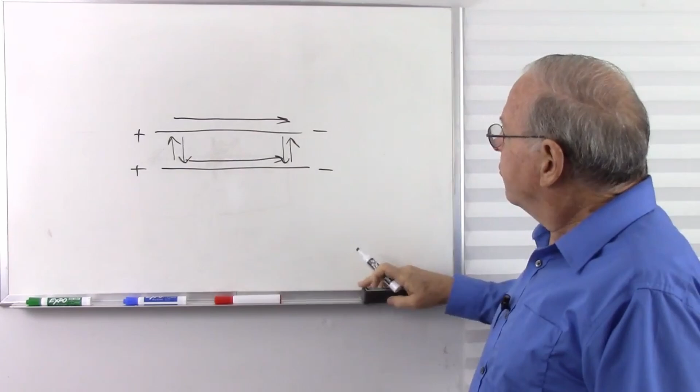But if he reversed it so that the current in one wire was traveling in the opposite direction, the wires would repel each other. And in further experiments, he developed what we now call Ampère's law, which is that the attractive or repulsive force between the wires is directly proportional to the length of the wires and the strength of the current, and inversely proportional to the distance between the wires.

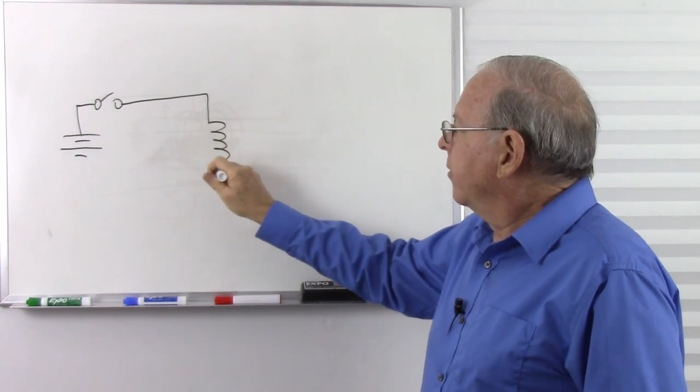In the 1830s, Michael Faraday and Joseph Henry independently did experiments with coils of wire where they took their battery, and I'll put a switch here to control the current, and they coiled up the wire so that the magnetic field became concentrated. And one thing they discovered is if you put two coils of wire near each other, and I believe what they did is they made a very tiny gap in this loop of wire here. So there's a gap. I'll make it bigger just so you can see it.

But what they discovered is when you closed the switch you got a tiny little spark over here. And when you open the switch, you got another spark.

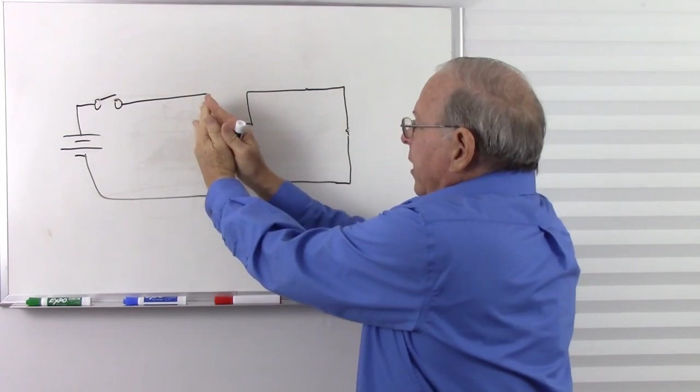So what they discovered is that when you close the switch, what happens? We close the switch, a magnetic field builds around this coil and it crosses the other coil. And when that magnetic field moved across the other coil, it caused a current to flow here, which induced enough voltage to ionize the air and cause a spark and cause current flow in the loop.

But once the magnetic field stopped moving, there was no longer any current in this wire. They could not measure any magnetic field or any other way of measuring current in the wire. But then again, when they opened the switch, that magnetic field collapsed, and the moving magnetic field, now going the opposite direction once again, caused a current to flow, which caused enough voltage to develop across the gap to ionize the air and cause another spark.

So what they discovered is what we call mutual induction. The moving magnetic field around this coil induces a current in the other coil, but the induction only happens when the magnetic field is moving. So Michael Faraday and Joseph Henry were doing these experiments about the same time, and the scientific community chose to give credit for the discovery of mutual induction to Michael Faraday.

What they gave credit to Joseph Henry for was he discovered that there was induction going on even in a single coil. He discovered that when he closed the switch, he would get the magnetic field around the coil, and then when he opened the switch, he would get a spark across the gap as the switch opened. His first thought was that the electric current had momentum and wanted to keep on moving because of that momentum and would develop enough voltage to ionize the air and cause the spark.

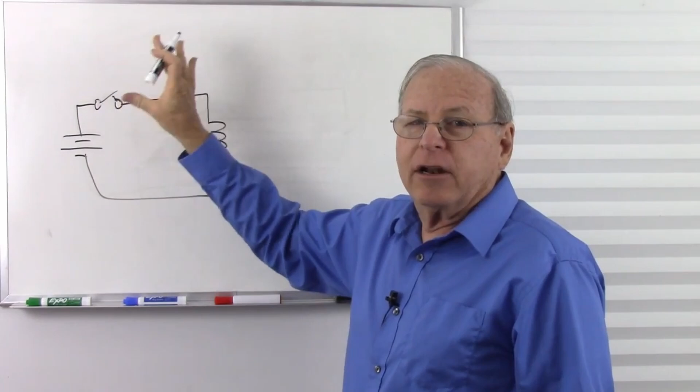But what he later realized was that when he closed the switch, the magnetic field built up and stopped, and then when he opened the switch, that magnetic field collapsed. And what he was realizing, if we take a closer look at it, is that if we look at a couple of turns of that coil, here's a couple of the wires in the coil, and they're adjacent to each other. What he discovered was each one of these has its own magnetic field. It's easier to explain this by waving my hands frantically rather than trying to draw something.

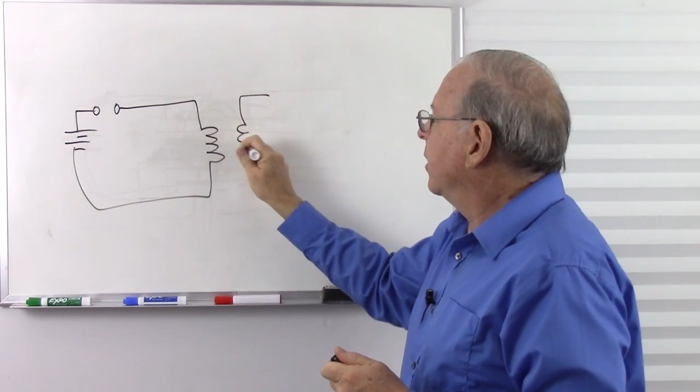But when he closed the switch, the magnetic field built up. When he opened the switch, that magnetic field collapsed, and the moving magnetic field from this wire moving across the next wire induced a current in that wire. So he discovered self-induction. So if you have two coils, put our battery back here, switch, coil number 1, coil number 2, and our little spark gap.

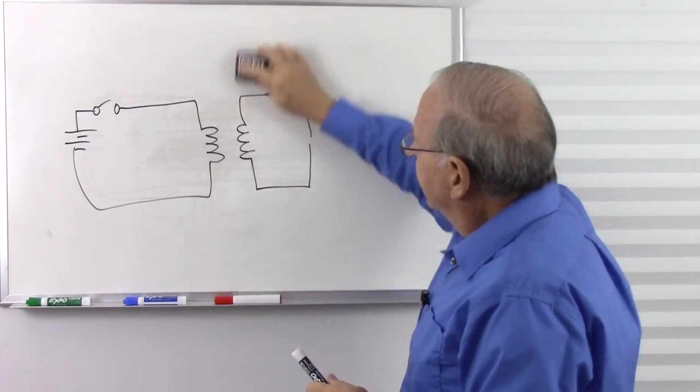If you have two coils and the moving magnetic field around one crosses the other one, that moving magnetic field induces a current in the other coil, only when it's moving. That's mutual induction, credited to Faraday. And then Henry discovered that there's actually induction inside the coil itself that we call self-induction.

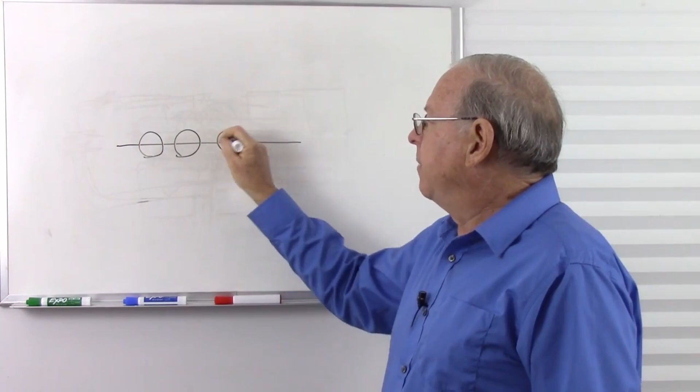So what we've discovered is that if we have a wire and there's no electrical current flowing through the wire, there is no magnetic field around the wire. But if there is a current flowing through the wire, there is a magnetic field around the wire, and that magnetic field is cylindrical shaped, as Oersted discovered by moving the magnet around it. And there's no north or south poles because the south and north poles of this field are basically lined up.

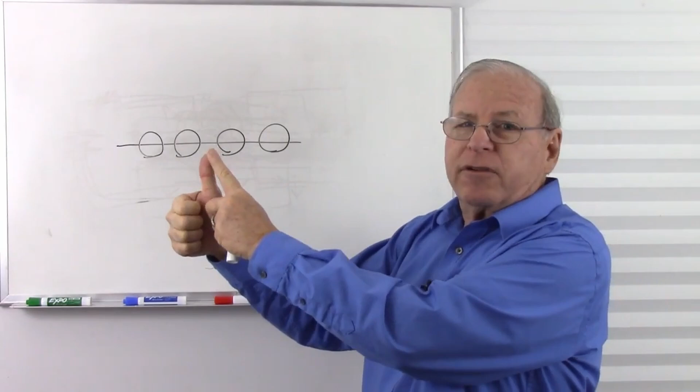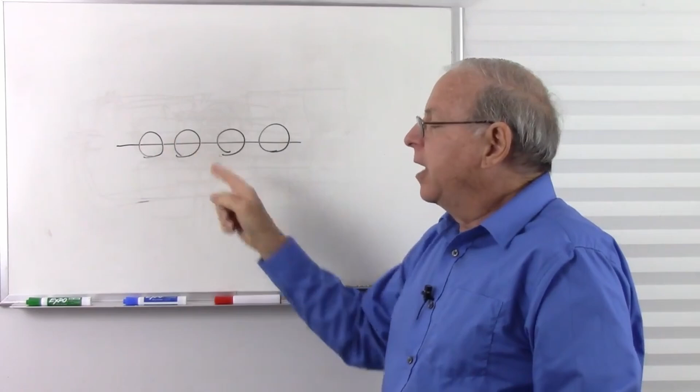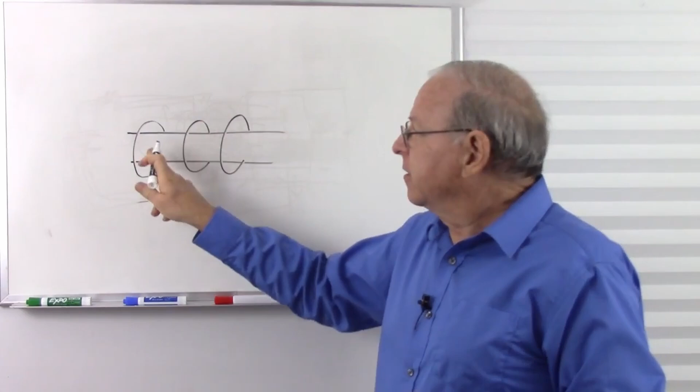It's something like this. If you take your right hand and stick out your thumb, here is the direction of conventional current, and the magnetic field wraps around the wire in the direction of your curled fingers, with the north poles of all these little magnetic domains, if you will, going around circularly with the north poles off the tips of your fingers. You can look at it like this. We have the wire, and here's our magnetic field. And look at that magnetic field like a whole bunch of little permanent magnets lined up end to end.

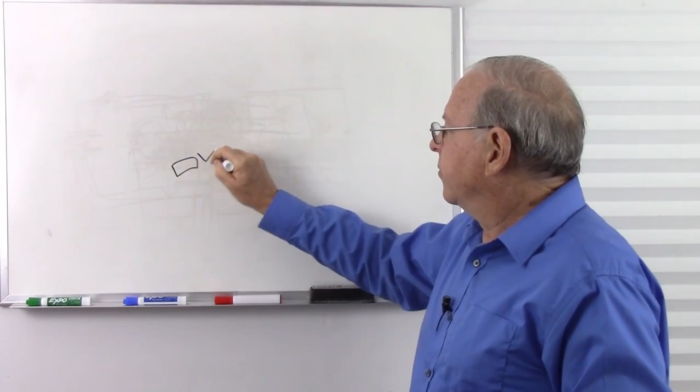And I'll draw this from a different angle. Think of it like this. Here's one magnet, here's another magnet, here's another magnet, and they go all around in a loop, and we have a north pole, north pole, north pole. And so there's no north or south pole to this loop because they're all end to end, and the direction of the north and south depends on conventional current: it goes the direction of my thumb, the north poles are the directions of the tips of my fingers. That's what Oersted discovered. So we have the wire, no current, no magnetic field.

What we also discovered is if we have a magnetic field around that wire, if that magnetic field is not moving, it has no effect on the wire. But if the field is moving, it induces a current. So if the field moves one way, it induces a current in one direction. And if the field is moving the other way, it induces a current in the other direction.

So here's what we know about electricity and magnetism. When you have an electric current through a wire, we have a magnetic field around that wire, but only when the current is moving. If we move a magnetic field across a wire, we get current in that wire, but only if the magnetic field is moving. So there's the relationship between electricity and magnetism. Moving electricity causes magnetism. Moving magnetism causes electric current.

But why do you have a magnetic field in the first place, and why does it only exist when the current is moving? Well, let's set some groundwork to understand that by looking at some atomic particles. Let's start by looking at the proton, which is an atomic particle that has a positive charge. I could go in deeper and explain what a proton is, being a persistent kink in space-time. Let's not go there now. That's for another video some other time. But a proton is a particle that has a positive charge.

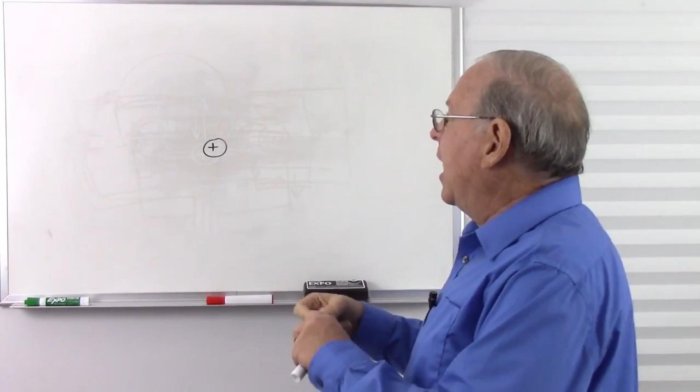And if we add enough energy, such as heat energy, that electron will leave. It'll have too much energy to stay in orbit, and now it's off somewhere else, and it's able to move wherever it wants to move, and the proton's able to move wherever it wants to move. And if we remove the energy so that the electron doesn't move away, it will come back in and fall back into orbit around that proton because they are attracted to each other and want to be near each other.

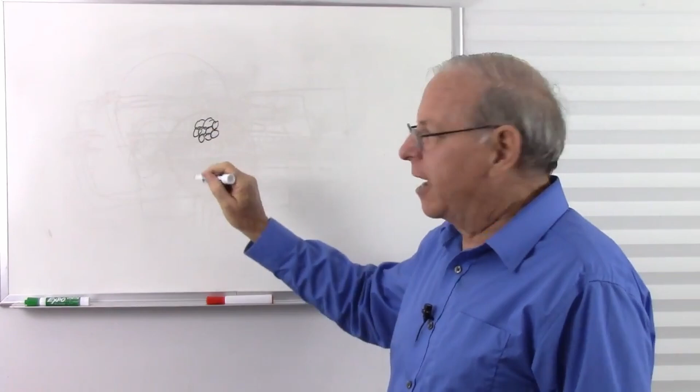Now let's take a look at a copper atom. A copper atom, we have 29 protons, all clustered in a little nucleus. Don't want to get into atomic physics as to why that happens, but it does. So there's our copper atom, 29 protons, and so those 29 protons will tend to attract in 29 electrons. And they do this in such a way that 2 of those electrons will be orbiting so close. Now these are orbital shells, as they call them. That's not as clean as this.

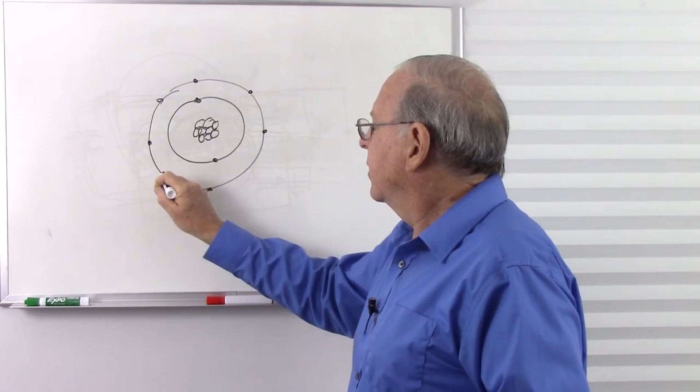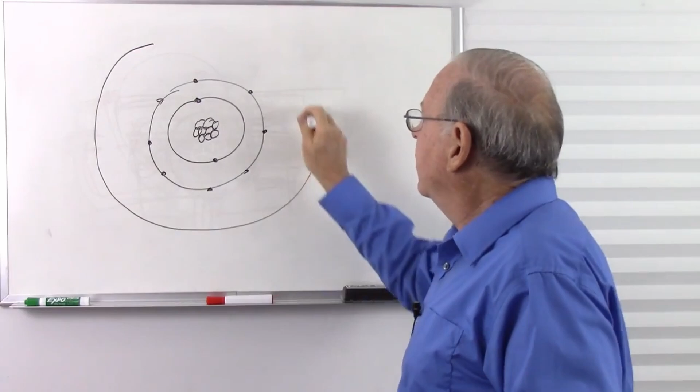The energy of the electrons kind of forms a sphere around the nucleus, and depending on the type of element, they might concentrate in certain areas. But just think of the electrons as a sphere around the nucleus. But we model it as 2 electrons in orbit at that distance. And there will be 8 electrons in the next shell up. And then a couple more shells until we have 28 electrons in these shells. And finally, we have the outermost shell, which has 1 little lone electron.

Now, it's the nature of metals, which by definition, with a couple of exceptions such as arsenic and antimony, metals are typically elements that have 1, 2, or 3 electrons in this outermost shell, which is called the valence shell. And that's where all of your electrical and chemical activity takes place.

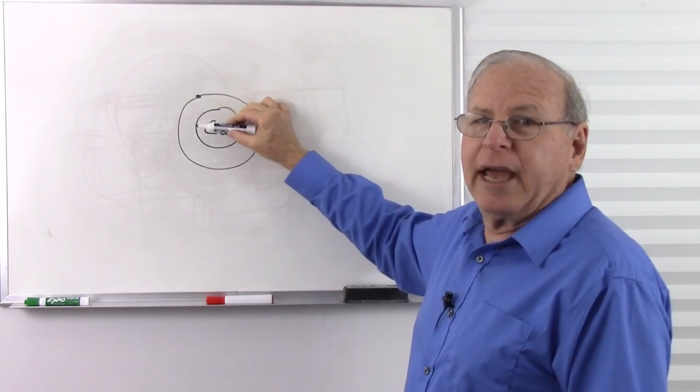And so we look at atoms as having 2 parts. One part is the kernel. And we'll make this a copper kernel. And that will be the nucleus plus all of the electrons except for the outermost shell called the valence shell. In the case of copper, there's only 1 electron in that valence shell. So there is your copper atom. The copper kernel, the nucleus plus 28 of the electrons, and the 29th electron out in this outer shell.

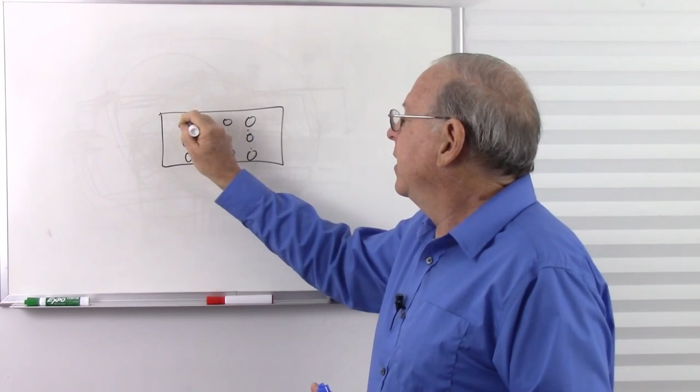When metals form a mass, they form a structure such that that outer layer of electrons does not fit in cleanly. And so, if I have a mass of copper, these are copper atoms. Of course, there's gazillions and gazillions of copper atoms, but for each atom, actually there's copper kernels. For each kernel, there's one electron nearby. But because of the nature of the way metals form structures, they form what's called a metallic bond. And the metallic bond is such that the outermost layer of electrons is free to move around.

So these electrons can move around just like the air moves around in this room. So I have molecules of air moving around in the room, and they can move wherever they want to, but they need to stay evenly distributed, otherwise the pressure will become different in one place to the other. So if some air molecules move this way, some other molecules have to move the other way to take their place to keep everything even. Same thing happens in a mass of metal. Electrons can move around, some electrons can move one way, but other electrons have to move the other way to take their place, just to keep them all evenly distributed.

Now if I take a battery and connect it across this copper, positive to negative, now this positive charge is going to attract electrons in that direction. And this negative charge is going to push electrons in that direction. And the battery is able to supply electrons to come in this way and to suck them out this way. The battery actually acts like a pump, and it tries to pump electrons around the circuit. And so the positive charge pulls electrons this way and sucks them out. The negative charge pushes in electrons this way, and we now have the electrons moving through the wire, and that's how an electric current is made.

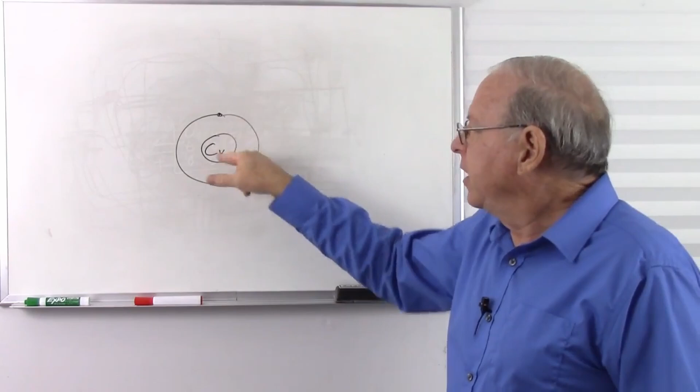So how does this moving current cause a magnetic field? Well, before we tackle that, let's take another look at what's going on. Taking another close look at that copper atom. Here's the copper kernel. Here's the valence electron. And right now we have 29 protons and 29 electrons total, so the atom is electrically neutral. There's no detectable electrical charge here.

However, if we throw some energy in, this valence electron, which is the most loosely bound electron, can leave the atom. And when that happens, what do we have? We have some electron over here, and we have 29 protons, but only 28 electrons. It's no longer electrically neutral, so this appears to have a positive charge. So what we have now is a positive copper ion and a free electron, and that will stay that way until the electron loses enough energy, or some other electron with less energy comes back in and falls back in around the orbit, turning that positive ion back into a neutral atom.

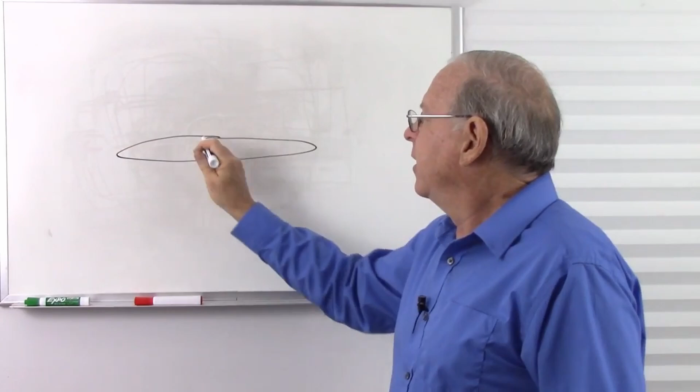Well, a funny thing kind of happens with what an ion is. The ion is not positively charged per se because of the positive protons in there. It's an ion because of the absence of an electron. This might be a little hard to wrap your mind around, so let's examine it closer by playing a game of golf. So we've gotten to the green. Here's our green, and there's the hole. And a golf hole is something that has an attractive force toward golf balls because they tend to end up in there. Some of my golfing friends might not think that's funny, but we can look at it that way.

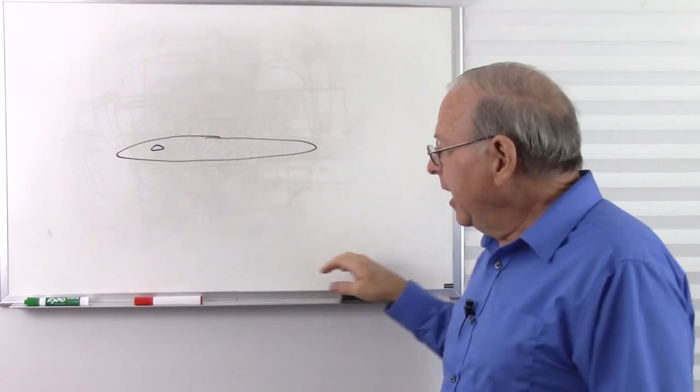So there's the hole, and what is that? It's nothing. The hole is only there because somebody took some dirt out. So the presence of the hole is not the presence of anything, it is the absence of dirt. And an ion is, go back to our copper ion. So there's our kernel, 29 protons, 28 electrons. And so it has a positive charge not because of the presence of the protons, but because of the absence of that 29th electron. So it's very similar to that golf hole. It's a hole not because there's something there, it's a hole because there's something missing. So now let's take a look at Ampere's experiments again.

Here's our two parallel wires. And these wires consist of, let's say they were copper wires, of gazillions and gazillions of copper atoms. And since it's a metal, and since the outer electrons are disassociated, we can think of it as gazillions and gazillions of copper ions with free electrons floating around.

So let's draw those copper ions. Draw them as little circles, kind of look like little holes. As a matter of fact, that's what physicists and engineers call them. They call them holes. They're absences of electrons. So I'll just draw these ions down here. I'm drawing them on one side of the wire just to facilitate what I'm drawing, but they'll be all through the wire, and there will be gazillions of them. And for each one of these, there is an electron that is free to float around the wire.

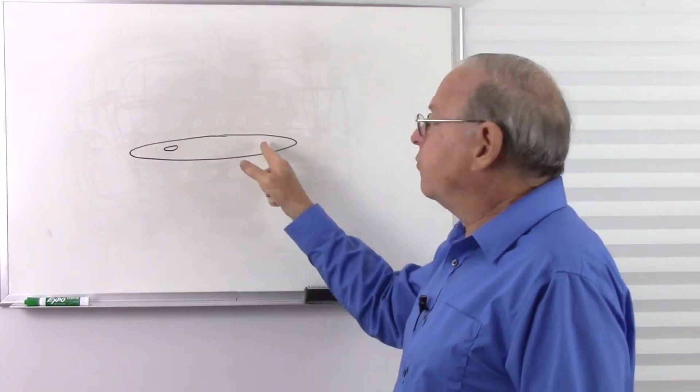What happened is that the keeper came out there and took some dirt from here and put it over here. The dirt moved, not the hole, but you can't tell. You go out there and you say, I didn't see it move. All I can see is it was there yesterday, today it's there. The hole moved. And so that is what happened, is that the dirt moved one way, but the hole moved the other way. And positive charges do the same exact thing.

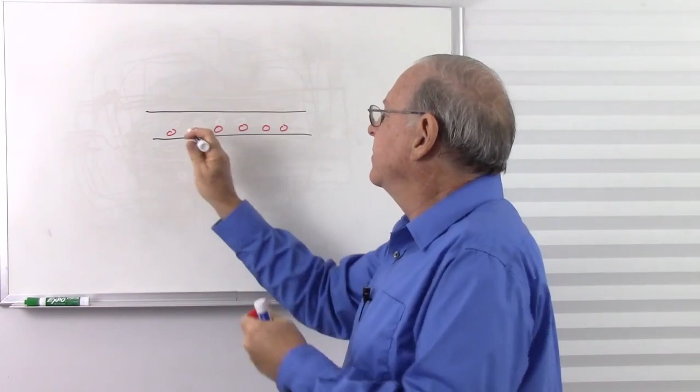So back to our wire here. And once again, here are our positive charges, or positive ions. And here are our electrons. And let's see, negative to positive. The electrons are moving that way. So this is just like if you have a whole bunch of holes in the golf course and we're moving the plugs of dirt from here to here to here. Well, the dirt is moving this way, but the holes are moving the opposite direction. And exactly the same thing happens with these positive ions. So as the electrons are moving one way, the positive charges, not something physical, but the absence of the electrons, are moving in the opposite direction.

And it might be like, what? There's nothing really moving. Well, there's nothing moving when the hole moved, but the attraction force that the hole exhibited on the golf balls did move. So the attractive force that these ions exert does move, even though the ions don't. So when the electrons move this way, the positive charges move the other way.

We've also established that when these charges are stationary, when we don't have any voltage across there, nothing special is happening. But when we put the voltage across there and get these charges moving, we get a magnetic field around this wire. We know that because if we put a compass needle close to it, that compass needle will line up perpendicular to the wire. So how do these moving charges produce a magnetic field? Well, to explain that, we have to talk about relativity.

We experience that every day. Let's say that you are stopped in traffic at a traffic light on a slight hill. You're waiting for the light to turn green, and the car next to you starts to roll backwards. You see that car rolling backwards, and you think, holy cow, I'm rolling forward, and you press harder on the brake to stop yourself, and you say, well, I wasn't rolling forward, he was rolling backwards. But to you, for a moment, it seemed like you were going forward. You couldn't tell the difference because there were no other clues, because all you saw was him moving and you didn't feel anything. You thought you were moving.

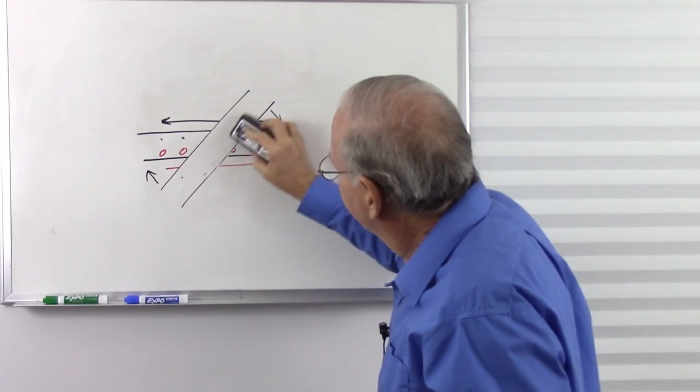Electrons, positive charges. Positive charges are now going this way, and electrons are now going this way. So what's going to happen? These positive charges are going to see more positive charges here, so they're going to be repelled, and vice versa. So it's going to want to rotate around the other way. So if we have two wires with currents flowing through them, and one of them is free to move, they're going to tend to align.

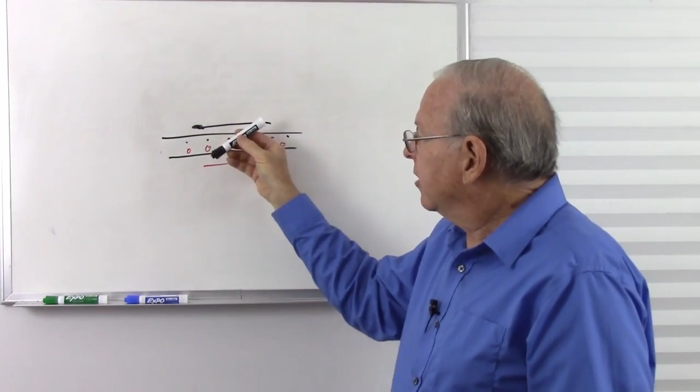Here's the far wire. Here's our moving charges. Electrons are moving that way. Positive charges are moving that way. And if I have another wire, let's just say this is a wire that has the electrons and the positive charges moving the same direction. They're going to tend to line up so that the electrons are moving the same way and the positive charges are moving the same way, because that's the way they're attracted to it.

They're attracted to each other, but if they're skewed, they're also attracted. These electrons are attracted to those protons and they'll want to line up. And if we're all the way over here, these electrons are completely repelled by these protons and it wants to flip over. So if that wire is free to move, it's going to flip over until it aligns so that the electrons are going the same direction and the positive charges are going the same direction.

So now let's take a look at that iron atom again. Here's an iron atom with electrons rotating in that direction. Any material would want to do this, but because they can actually rotate in iron, nickel, and cobalt, if I bring atoms together, they tend to line each other up. So I end up with a lot of electrons rotating in the same direction in these particular materials if I bring them together.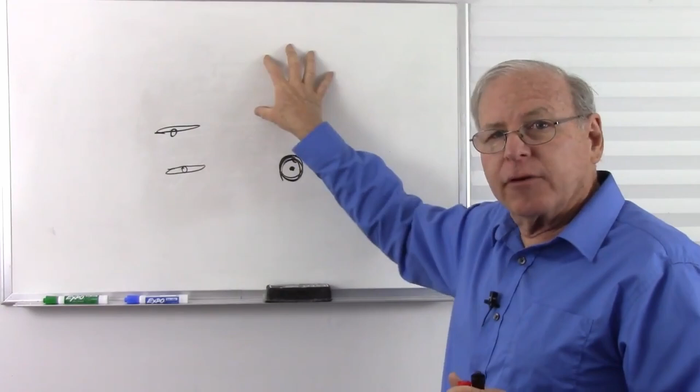Now normally you might have a group of them aligned one way and another group aligned another way and another group aligned another way, and they tend to still cancel each other out. So iron, nickel, and cobalt will still tend to not have magnetic fields around them, because even though groups of them will tend to line up, they tend to cancel each other out.

However, let's say I have my wire carrying my electric field, or my electric charge carriers, and let's get our currents going, and let's get our positive charges going this way. Now I'm going to bring an iron atom close to it, and from this point of view, if the iron atom is over here off to the side,

the electrons are going to want to line up to move in the same direction as the electrons in this wire here. So what's going to happen is the electrons will want to rotate in that direction. Now these electrons away from the wire are going the opposite direction, but they're further away, so they have less effect. Now the distance is a tiny, tiny distance, but it's enough to make the difference.

So the electron orbits in this iron, nickel, or cobalt atom are going to rotate until they're revolving in such a way that the near electrons are going the same direction as the ones in the wire. So they're going to want to line up. So just like the two wires want to line up, these electrons want to line up too and go the same direction. Now if I move the wire away, it's going to want to line up with its buddies and the magnetism goes away.

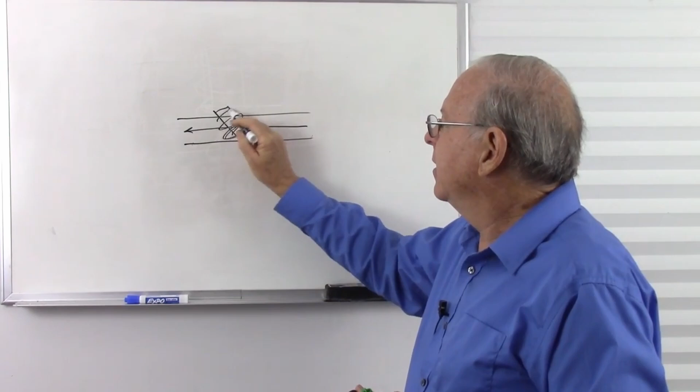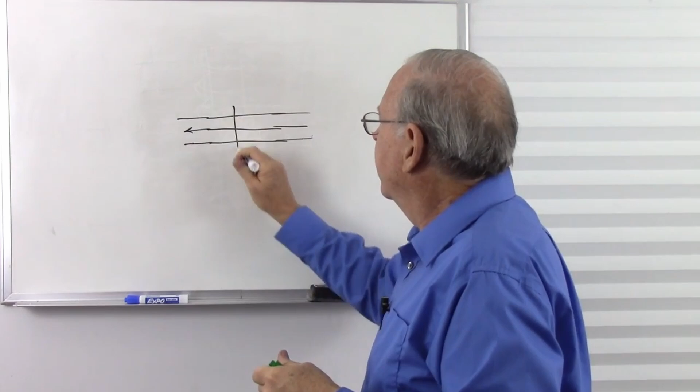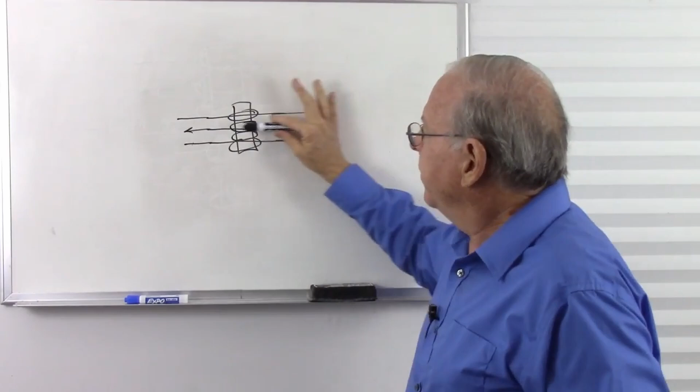And so this is going to want to rotate. If we allow it to rotate, it's going to rotate until those electron orbits align with the direction of current in the wire. So that is why a compass needle aligns perpendicular, because the orbits are in a plane that is in the same plane as the electrons in the wire, and that's the way it wants to align.

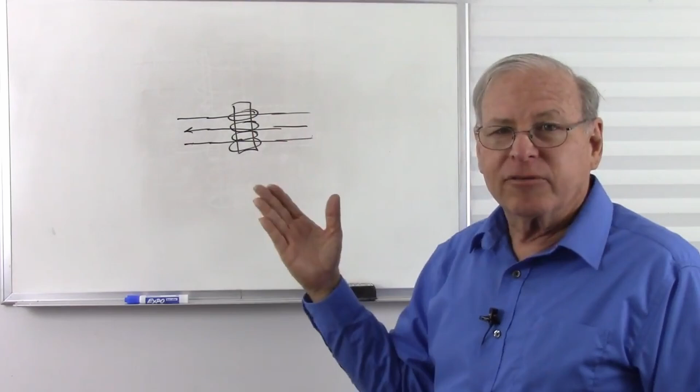And of course, if we reverse the direction, so now that the electrons are going the opposite way, it will want to flip over until it aligns up with them going the right way. So that is why a permanent magnet or compass needle wants to align perpendicular to a wire that's carrying an electrical current. Let's see what happens with a permanent magnet in the Earth's magnetic field.

What's causing that? Well, here is the Earth, and it has a magnetic field. We know that because a compass needle aligns with the magnetic pole of the Earth. So here's the rotational pole, and the magnetic pole is off to the side. And we do know if we take a compass needle, it's going to align with the magnetic pole, right? Why does it do that?

Well, the compass needle is a permanent magnet, and the Earth has electric currents back down in the iron core. There are electric currents, and guess what? Those electric currents are going in that direction. They might be smaller than this, might be little eddy currents, and they're all lined up in one plane. I'm not going to try to explain why now, they just are. So now, since all those are lined up in one plane, what's going to happen if I put a bar magnet out here? It's going to want to line up so that its electrons are orbiting in the same plane.

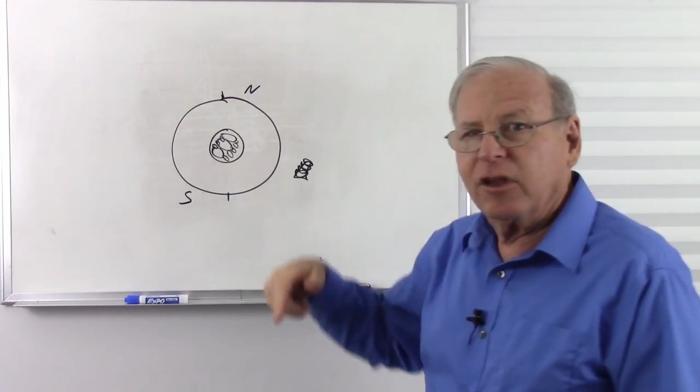Now, they're pretty far away from each other, and the magnetic field of the Earth is actually pretty weak, but it's enough. That's why a compass needle doesn't snap into place. You see, it kind of rotates slowly. It doesn't have a lot of force, but it's enough. If you leave it free to move, it will line up with the Earth's magnetic poles, and that's what it's doing: the orbital electrons in that permanent magnet are lining up with the motion of the electrons in the Earth's core. So we have that relativistic effect again.

And if we move it towards the north, let's say we put that magnet right at the North Pole, what's going to happen? It's going to line up this way. So if the magnet is here, it lines up perpendicular to the Earth, but if we're at the pole, it's going to line up so that these orbits are going the same direction as those orbits, so it's going to line up in a straight line, but at the equator it's going to line up horizontal, and so as we go in between, well, maybe up to here, it's going to have some other angle.

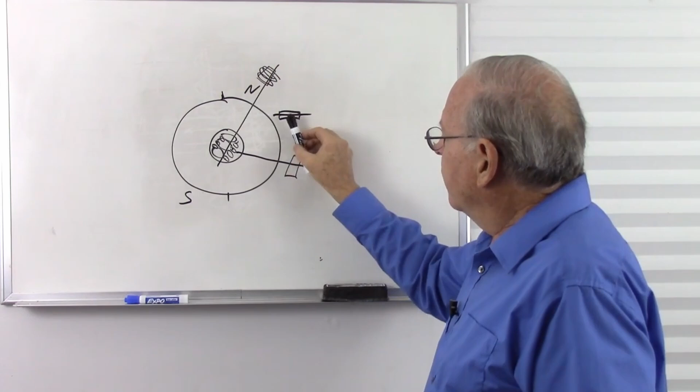So the further north we go, we get what's called magnetic dip. It's going to turn more and more. At the pole it points in, at the equator it's parallel to the surface of the Earth, and the further north we go, the more the magnet dips toward the pole, until standing at the North Pole, your magnet is going to point downward, because that's the way the electron orbits want to line up. So that is why a magnet lines up with the Earth's magnetic pole.

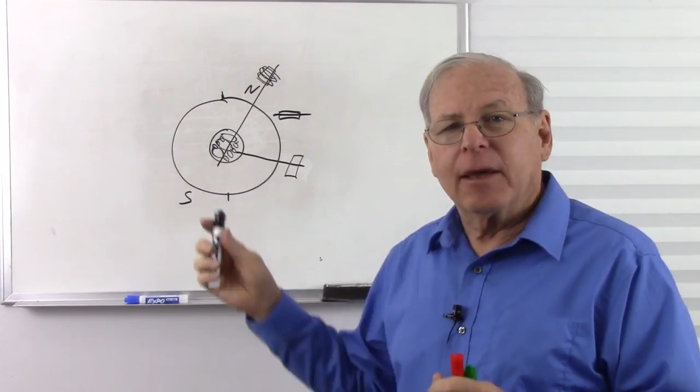So what I've demonstrated here is that all of the effects that we observe with permanent magnets and currents and even the Earth are all attributable to special relativity and the motions of electrons. And where's the magnetic field? The magnetic field is totally imaginary. It's what we call this effect. Now we know what we attributed to a magnetic field is just electric fields that we cannot detect, but are detected by the other charges. So I just demonstrated that magnetic fields don't exist.

They're actually caused by special relativity and the motion of electrons and how they tend to bunch up different ways thanks to relative motion and special relativity. So should we stop talking about magnetic fields? Well, there are other imaginary forces we talk about every day. How about centrifugal force? We're familiar with that.

Let's take a bucket of water on a rope. There's a bucket of water. There's the handle. Put a rope on it, and I swing that around, and the water is going to stay in the bucket even though I'm swinging it around, regardless of gravity. And we say that's due to centrifugal force, a force that pushes the water against the bucket. But there's no such thing as centrifugal force.

We have a force pulling this way that we call centripetal force, and what's keeping the water in the bucket is the fact that the water wants to move this way, but we're pulling it that way, and the end result is it pushes against the back of the bucket. And that pushing force, although it's really the momentum, we call it centrifugal force. But it's an imaginary force. Some people think we shouldn't talk about it at all.

Others think we should. But it's something we can observe and quantify, and it's easy to wrap our minds around. Like when you turn around a corner, you want to go the other way. We call it centrifugal force. So we talk about an imaginary force here.

We also frequently talk about the Bohr model of the atom. So if I have a proton and an electron, the electron's orbiting the proton, I have a hydrogen atom, and if I fuse two protons together to make a helium atom, I get 2 electrons in orbit around it, and I add another one to make a lithium atom, I get 3 electrons. It's in a higher orbit, and we have this model of electrons orbiting the nucleus of an atom called the Bohr model, or sometimes the Rutherford Bohr model.